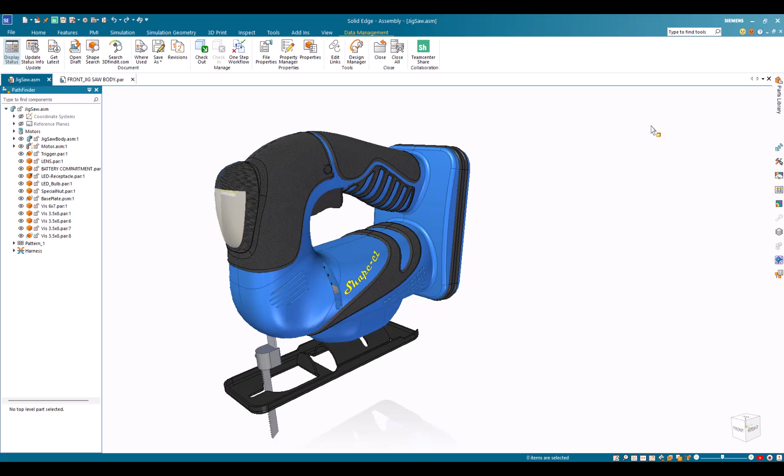Here, we have designed the Jigsaw dataset in Solid Edge, and we can use NX mold capabilities to design the mold for the cover of the saw. Teamcenter Share can be used as our collaboration tool for sharing the design with our engineer using NX with various permission levels. Tasks can easily be assigned inside Teamcenter Share to track the progress of the project.

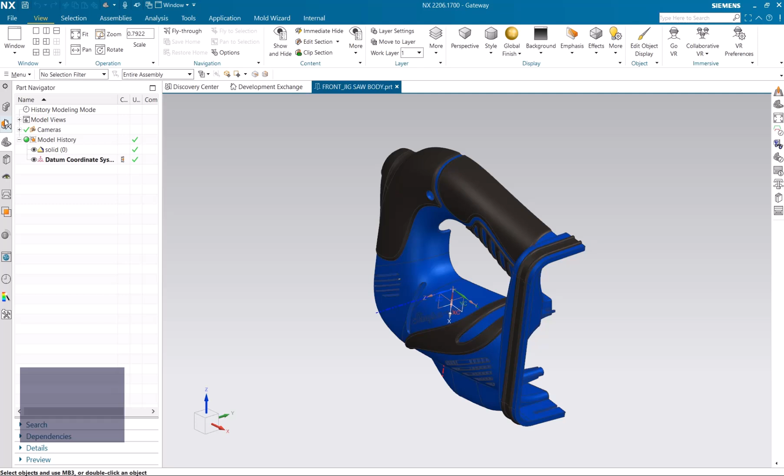To start, we will create an assembly structure for the new mold design. Using a conventional CAD system, this is a tedious and time-consuming process. By using a single command in NX Mold Wizard, the system will automatically clone an empty assembly structure for us with the chance to define material and help automate shrinkage.

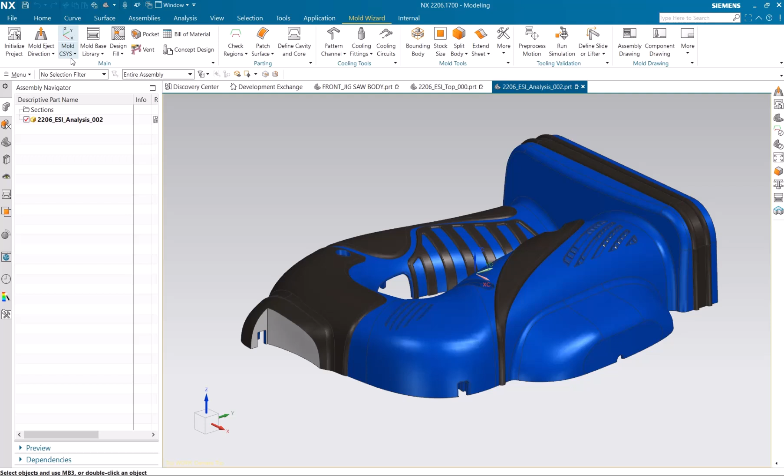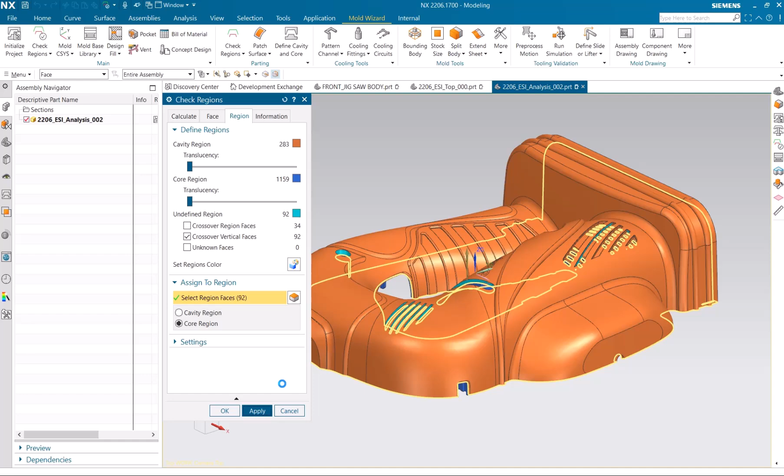The mold design process always starts with the following question: can this part be successfully molded? NX Mold Wizard's molded part validation tools analyze the part and automatically provide the designer with information about draft angles, undercut areas, sharp corners, etc. On top of that, it will provide the designer with an easy visual check of core and cavity side that doesn't require any special analysis or knowledge of mold design.

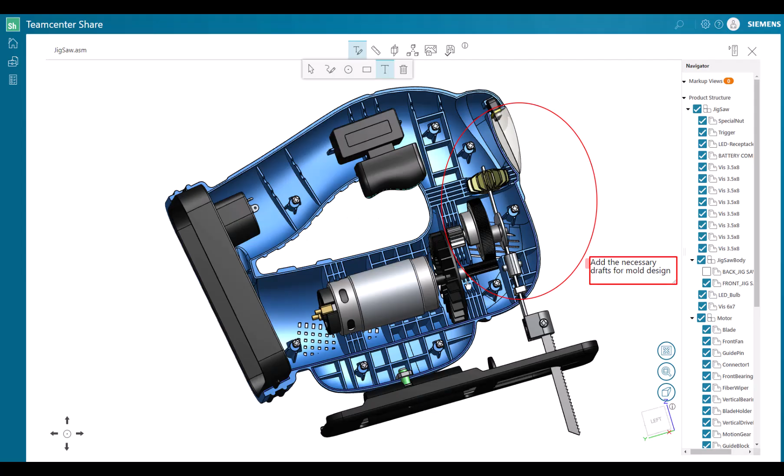Some design changes are needed for the faces that lack the required draft in this part. The needed design changes can easily be communicated via the view and markup in Teamcenter Share. The same markups can be viewed directly inside Solid Edge.

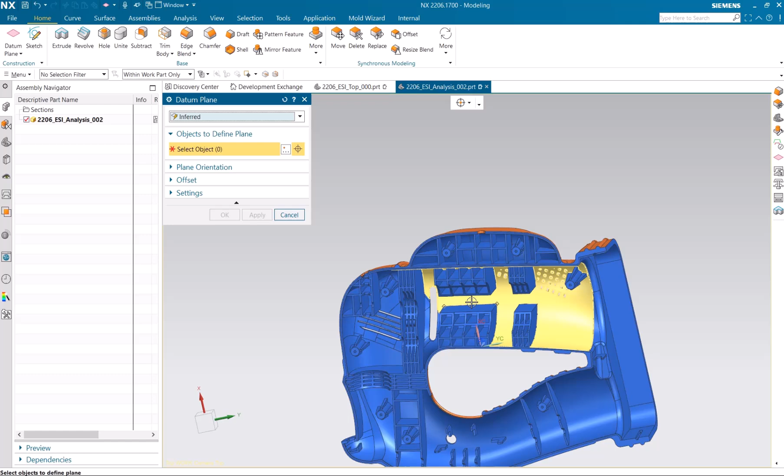And luckily for us, NX makes it easy to add the needed draft to any required faces, and with interoperability between Solid Edge and NX, the changes also apply to our part in Solid Edge with no need to start from scratch. With synchronous technology inside NX, we can do further changes such as replacing and deleting the needed faces. The same changes could have also been done inside Solid Edge and brought over to NX with the best-in-class interoperability we saw earlier.

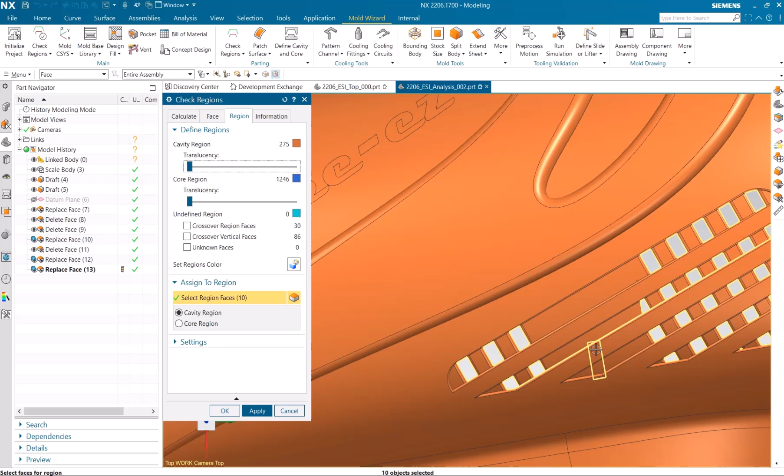Once the changes are done, using molded part validation, we can specify all faces of the model either to the core or cavity sides of the mold. Again, this process is completely automated.

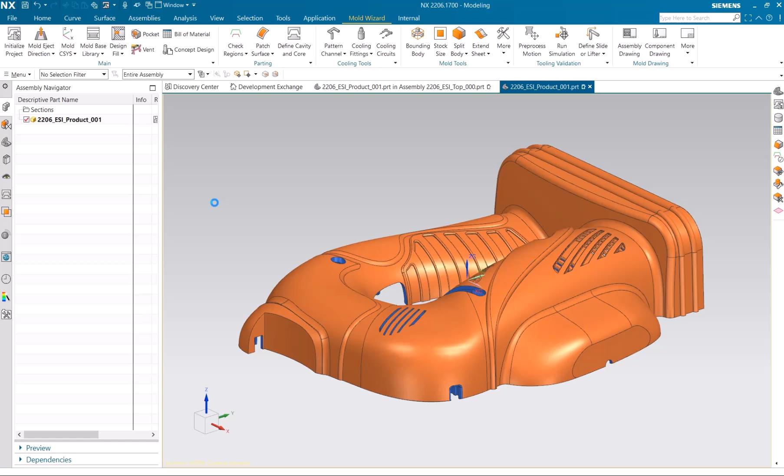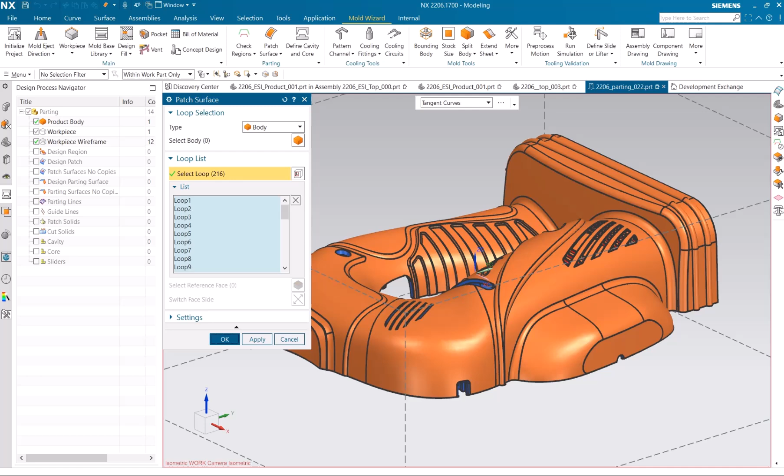Next, we will specify the workpiece. NX Mold Wizard can automatically detect the correct size of the workpiece, but if needed, we can always change it as per design needs. To split the workpiece into the core and cavity, it is necessary to patch all openings. We could either use the automated patching tools, or for complicated freeform areas, use advanced patching tools in NX Mold Wizard. Unlike conventional CAD commands, these advanced patching commands can speed up your work by 50%.

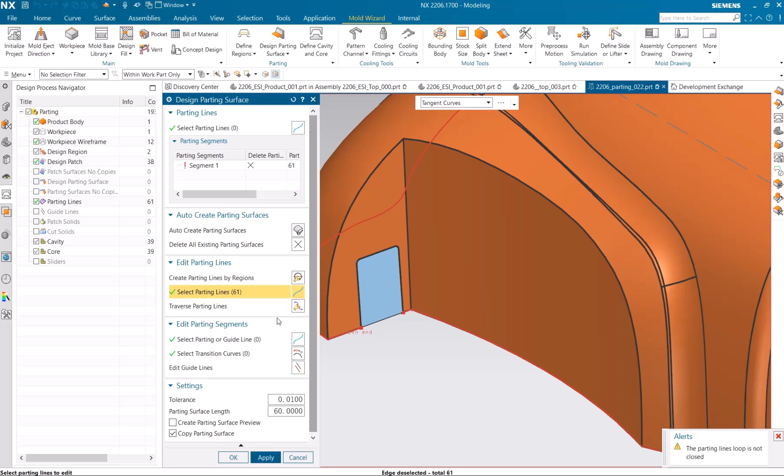Once we patch all openings in the mold part model, the next step is to generate the parting lines and parting surfaces. NX Mold Wizard has advanced automated tools for creating parting lines and surfaces. Based on the draw direction and different regions defined, NX Mold Wizard will automatically create optimal parting lines. These parting lines can be easily modified if needed.

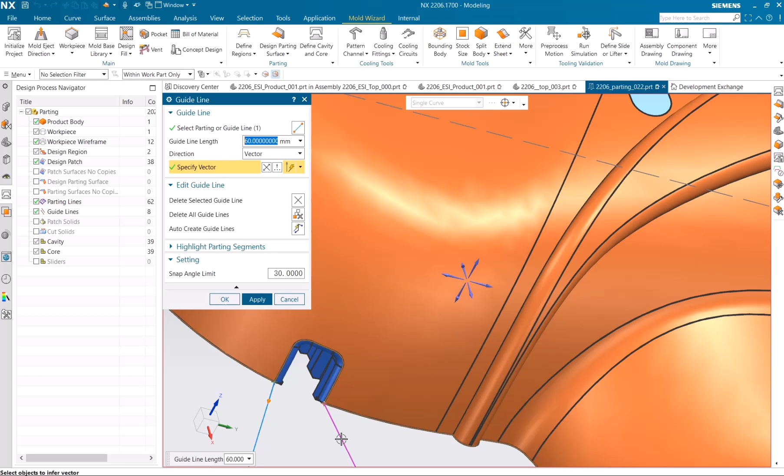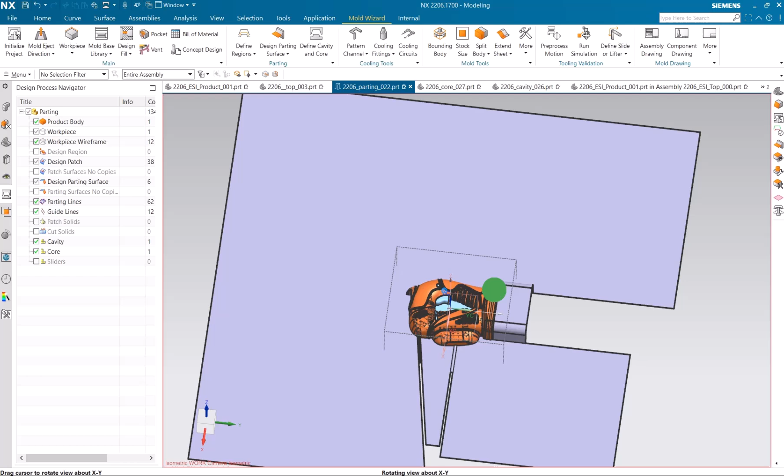NX Mold Wizard can also guide us through the creation of parting surfaces. Along the way, it will recommend surface types based on the geometry conditions. Once we finish designing the extracting regions and parting surfaces, we are ready to split the core and cavity. With a single click in NX Mold Wizard, the core cavity extraction can be executed automatically.

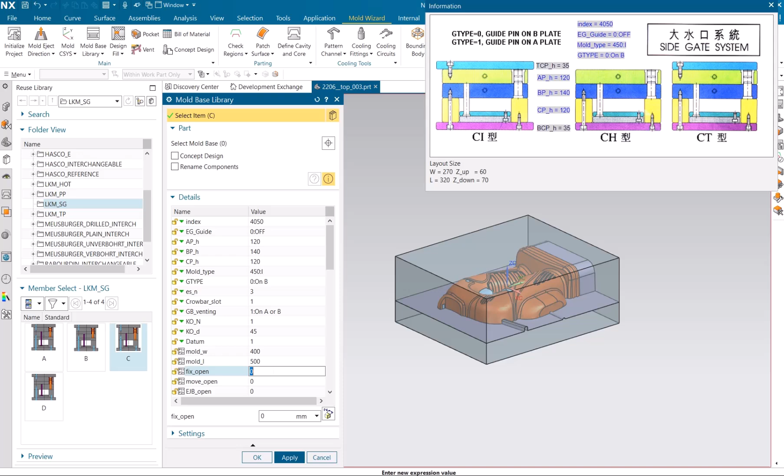Moldbase and Standard Part Library provides us with the widest range of standard parts and is based on major industry standards such as Hasco, DME, etc. Best part is that they almost automatically place the components at the right place in the mold assembly. The standard part libraries available provide a wide selection of commonly used components that you can install and adjust, such as sprue bushings as seen here.

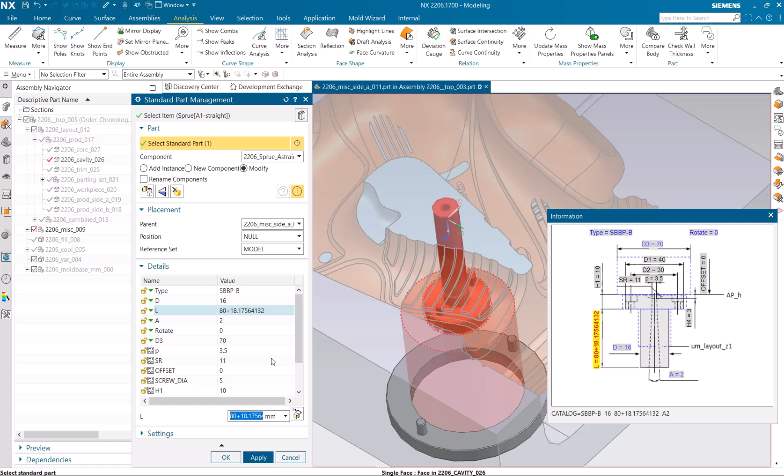Similarly, we can use the standard part library to add the necessary gates and runners and modify them fast and easy using NX as needed.

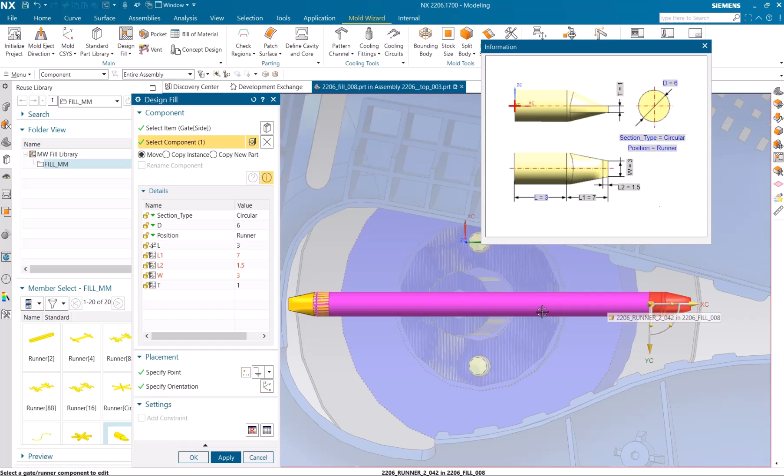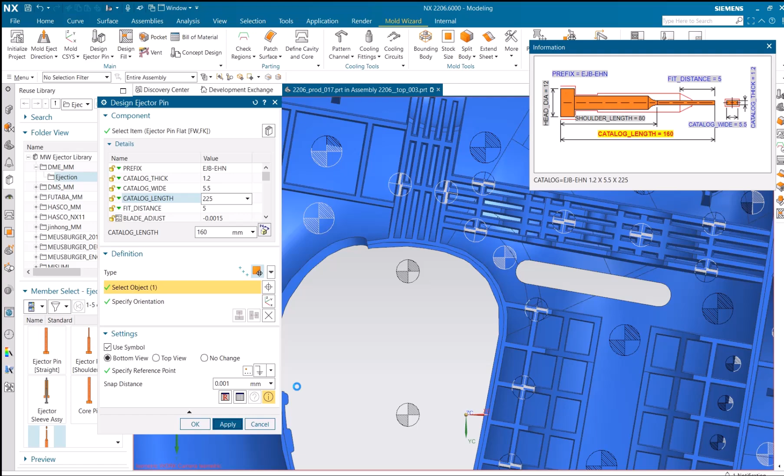We need some ejector pins to eject the part from the mold in this case. Ejector pins are another example of components that can be accessed in the standard parts library. And they can be quickly trimmed as necessary. Also, it's important to note these libraries that we are using here can be customized to match the company's design standards and include any component or assembly.

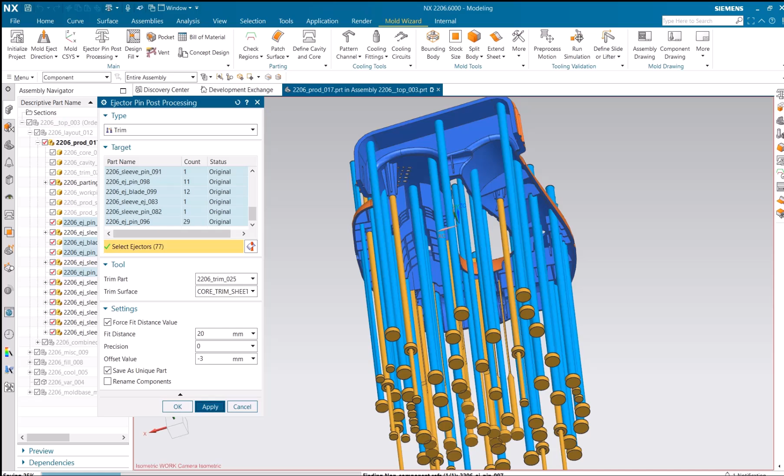So there you have it, the interoperability of Solid Edge and NX working in perfect harmony for easy and accurate mold design.